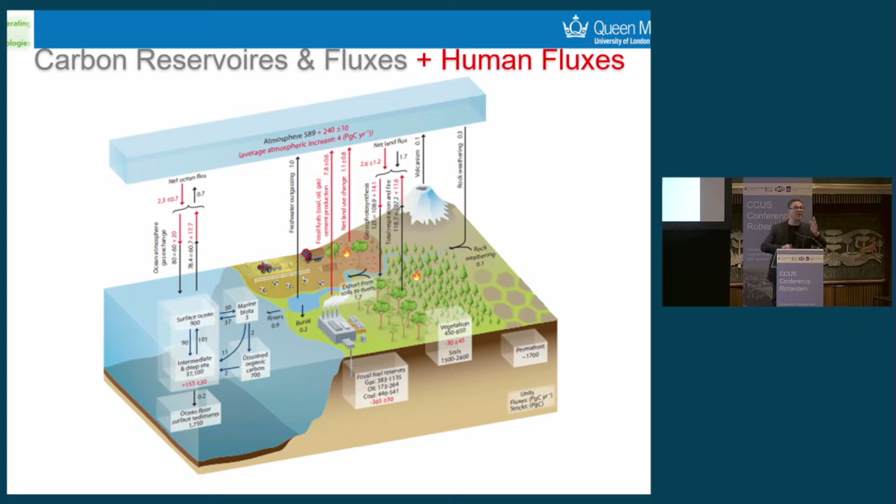So how much goes up and how much comes down? The important thing is that there are these key points where we're breaking the balance in that. So what I've tried to do is look at where the majority is going up and why not a sufficient amount is coming down.

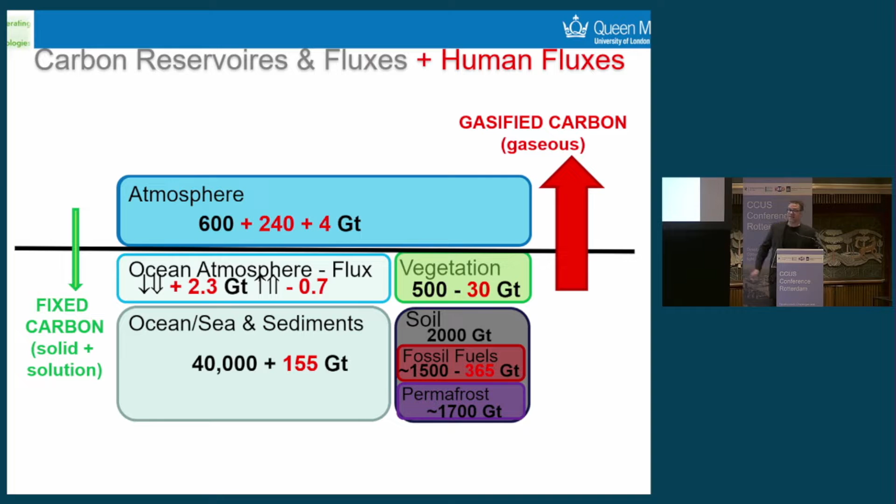And I think this is also one of the problems. A lot of people that are doing the capture and storage sequestering are trying to help solve the problem to reduce what's going up. But what FUNMIN is trying to do is try to increase how much we're putting down into solid, fixed, or in-solution carbon, and keep it there, including methane and other sources. So the numbers, the fluxes there in red, represent what we're doing.

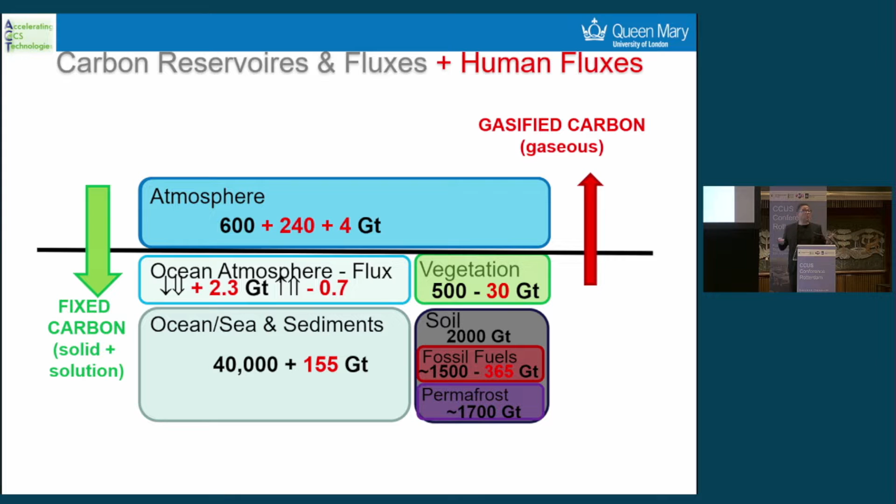That's the FUNMIN project. So what it involves basically is capture of the CO2. We have dissolution and formation of CO3 2-, which is an ion, a chemical driving force, to making magnesium carbonates. And the amount is in megatons. It's not quite the gigatons that we need, but at least it's somewhere along the way of usage.

Now, we've heard the joke about Coca-Cola—we can only use so much Coca-Cola. Where are we going to put this carbon, CO2? So the uses of this, the reuse, they need to be profitable. Because let's be real, if it's not profitable, it's not going to move quickly enough.

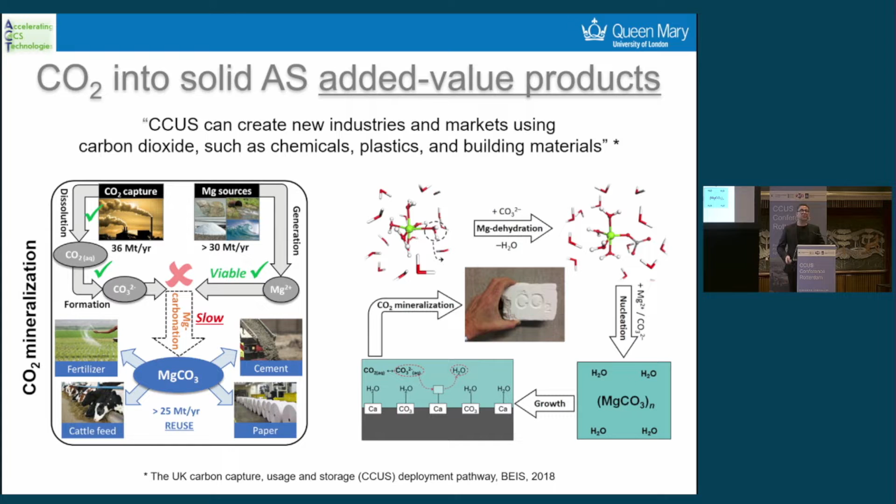So this picture here, where you see the block of CO2, this is magnesium carbonate, a form of it. We can use magnesium carbonates, and there are different forms of them for many different parts of industry. And that's the goal: to generate more solid blocks, control the mechanical properties, and understand the chemistry of it, both at the micro-nano scale and the macro scale.

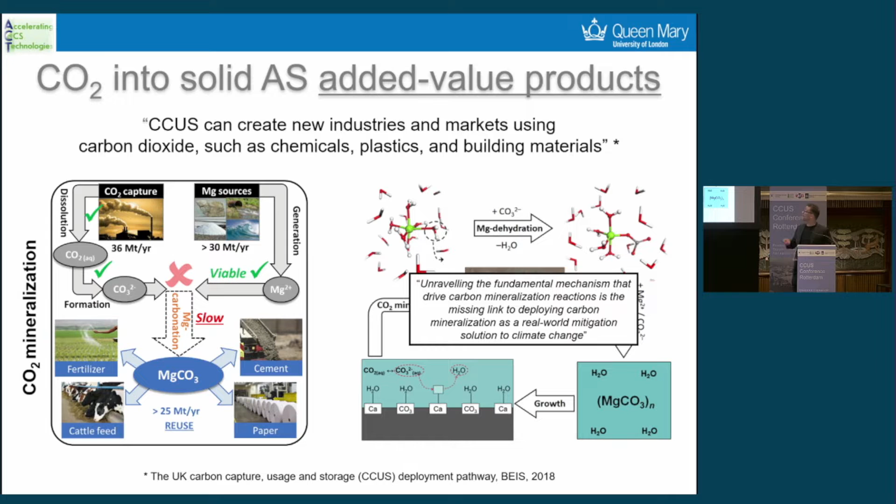So there's also these quotes about unraveling the fundamental mechanisms. That's what we're trying to do in FUNMIN. So there's the project. Originally, it was supposed to end in March this year. We've had an extension, thankfully, and that's been good for us. It's given us some time.

We're the smallest, we're the baby of the ACT family. We didn't have huge funding, but we had enough that we were able to get things going and use the extra time to do something.

So initially, what we wanted to do is make new generations of these carbonates with industrially relevant solutions, while also understanding the nanoscale properties and the nanoscale mechanisms and dynamics that were ongoing. The idea was to make next generations of carbonates—each next generation should be improved in terms of how quickly we can make them and the properties that they have.

And we've been able to achieve that to a degree, as you'll see.

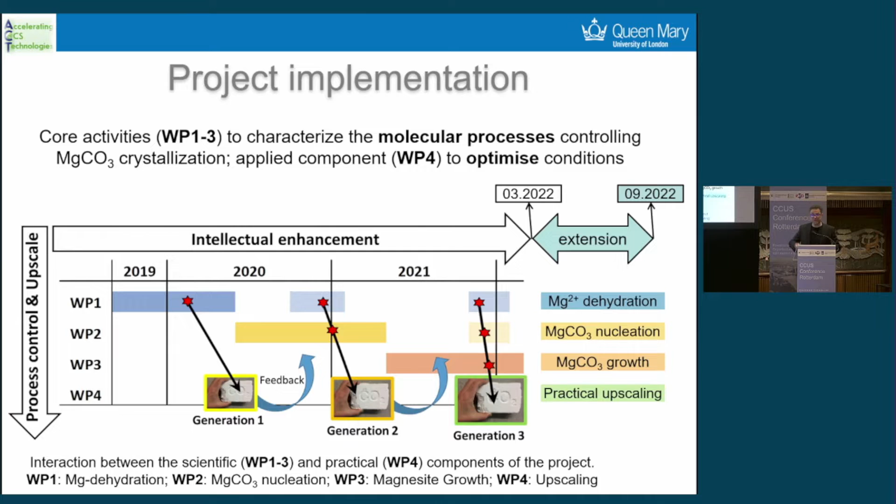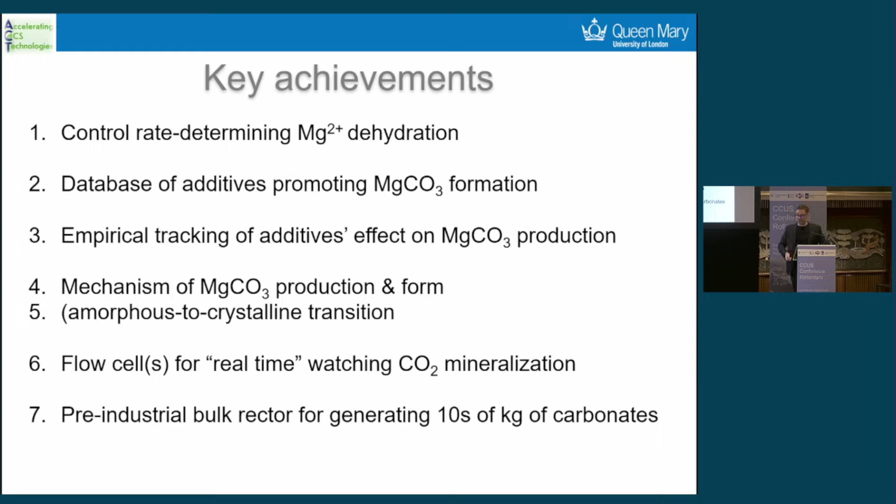So what we've started doing is computational simulations, neutron scattering - maybe you know about synchrotron radiation, neutrons are even at a larger level. We can use realistic blocks and samples representative of these materials. And that's what we've been able to do - engineer reactors and flow cells for real-time tracking of these carbonation processes.

One of the key things - what usually you do in industry is raise the temperature. Magnesium likes to hold on to things in 6 ways, just like a race car with a 6-point harness holds you in place better than a 3-point seatbelt. The ions are held in place the same way - that's why magnesium loves water. The key is to get the water off magnesium, and you use temperature to do that. You want to take some of the water off first to make magnesium available to react.

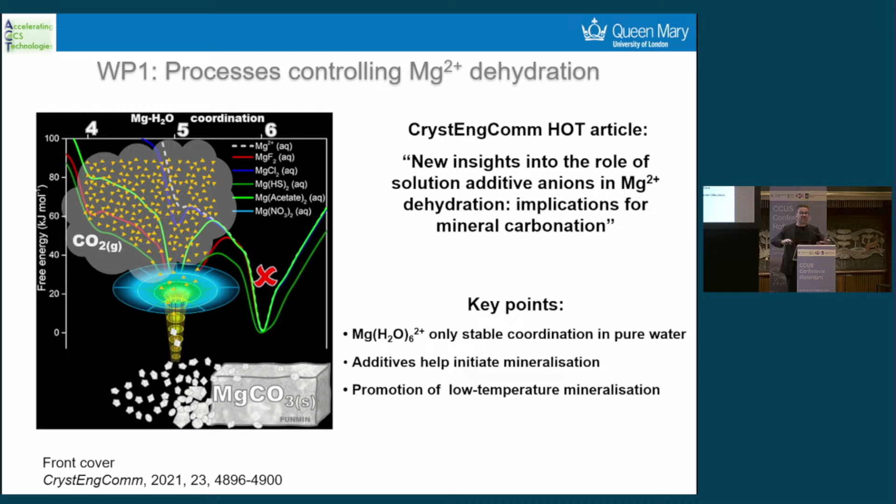We got a cover article on this - I think 9 publications so far. Most importantly, we've grown and have more partners now. Here we're showing a figure of the black hole we're trying to achieve, where we get the water off and allow this reaction to proceed. So computationally, we've made a database.

Why? Because in nature you have impurities from microorganisms, bugs, bacteria, sulfur-loving bacteria. They release impurities that catalyze aggregation and transformation - similar to when you poach an egg, where a small spoon of vinegar aggregates it. It's the same thing here. So which impurities are the best? Which ones are innocuous, non-hazardous, not costly? We've made a database that industry can use, or we can use.

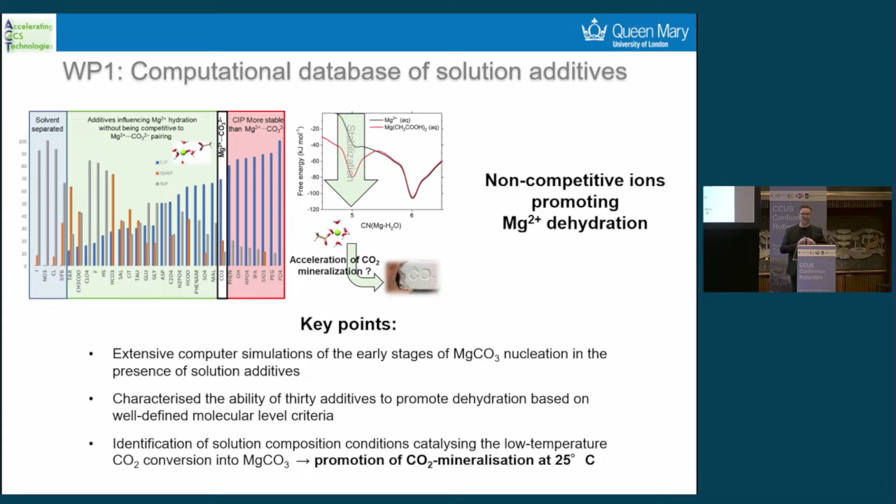We also look at the molecular dynamics - what's going on at the nanoscale, how these things aggregate like the egg, with or without vinegar. We want to keep it together and then grow those particles into something we can use.

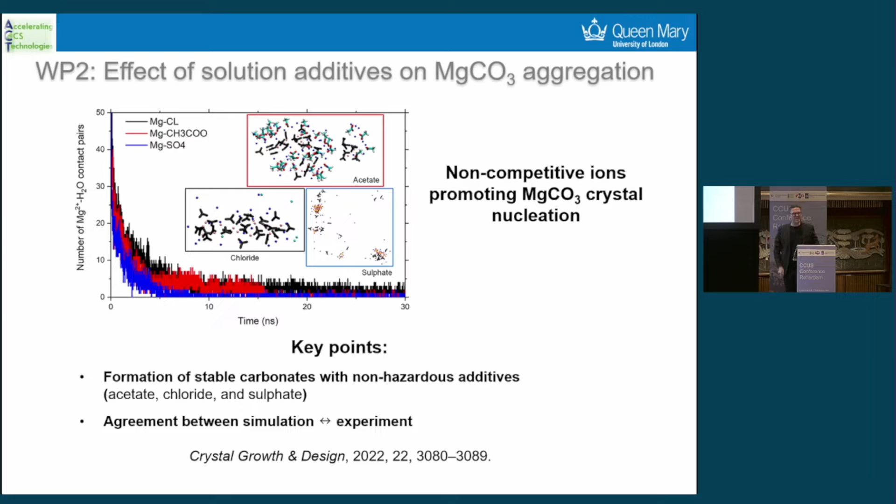This all sounds very theoretical, doesn't it? Where's the real world? Come on, Greg. Give us something we can chew on.

Okay, so we start doing experiments in Grenoble where we heat this up, mimicking what's done industrially with high temperature and high pressure to see what happens. We show the formation of hydromagnesite, then magnesite - similar to the Dolomite Mountains, calcium magnesium carbonates. Marble is a calcium magnesium carbonate.

I forgot to mention - how much carbonate can we make? Mount Everest is estimated at about 160 gigatons. We need a few Mount Everests worth. That gives us an idea of the scale of what we need to do.

So again, I said this all sounds very theoretical. I'm a theoretician - I do a lot of experiments, neutron scattering. Give us something real that we can touch.

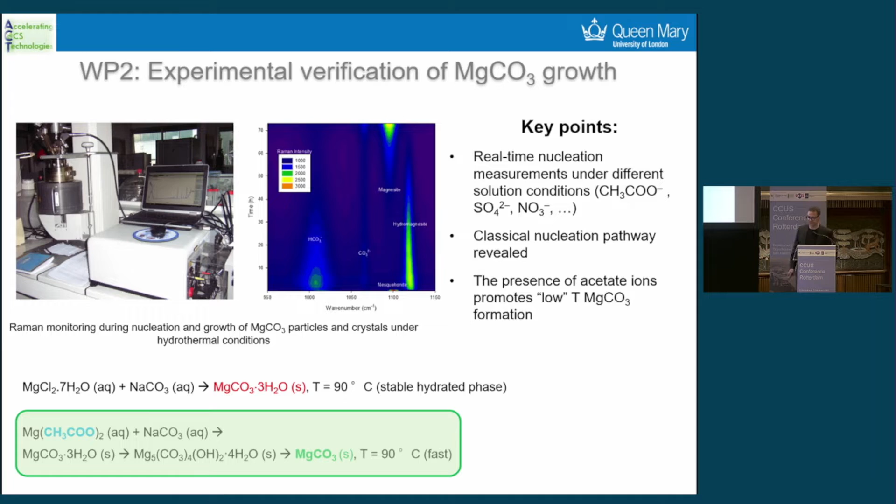So we started building reactors, literally in the backyard. The Homer Simpson model came before this - this is the first generation. We built reactors to do this and track it, at the nanoscale and at the macro scale.

Now what you see here are 2 different forms of the carbonates. We can control whether they're crystalline or amorphous, disordered. Why do you want a disordered system? Because they change, and as they change, they release the magnesium - which can exchange for cadmium, for example - while remaining carbonates. We can use that driving force of physical and chemical change in cementation.

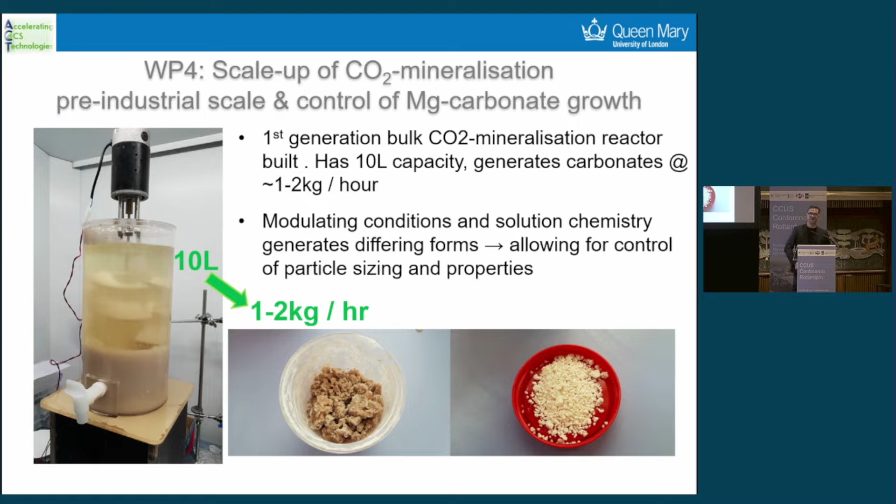Don't believe you, Greg. So we built a reactor that can go on a neutron beamline. Neutrons, believe it or not, at a particle accelerator are non-destructive. You've got this beam, about 7 centimeters in diameter, with high-energy neutrons, but they're not destructive - they can scatter off of matter.

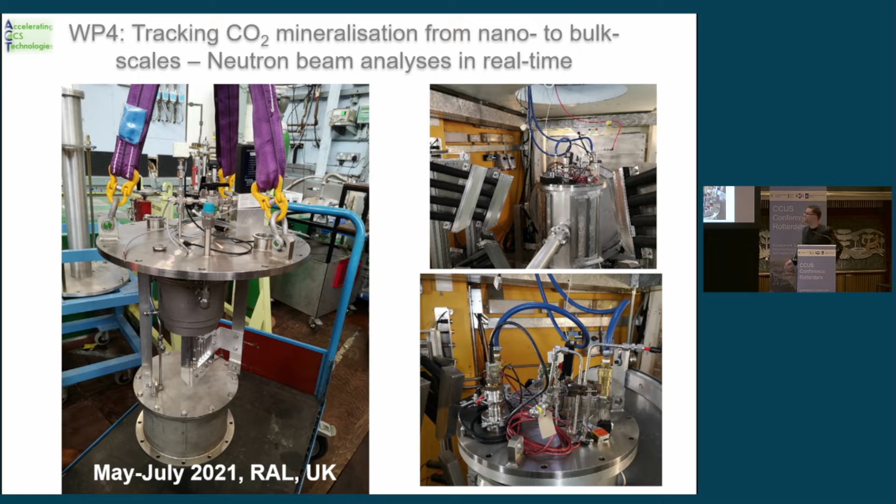When you scatter elastically, that's called diffraction. We've heard of diffraction. When you scatter inelastically, you might be familiar with Raman or these other techniques. We get an idea of the dynamics, the motions in there, the energy involved in these processes. So we inject CO2, we carry out the reaction in real time, the industrial reaction using the dirty stuff, impure. I don't want model systems. I'll go to the model systems later.

What we also made sure of is that the reactors can be reused. Watching the carbonation process and its interaction with the metals. We want to know if we can build these reactors and flow reactors to do this. Great. You can make a few grams. Good for you. We need gigatons.

So what does this tell us about? Quasi-elastic scattering. It sounds like a non-committal relationship or something. Is it elastic? So it's quasi-elastic because it's very low energy. You track translations, rotations, and vibrations in the whole material while the reaction is ongoing. This elasticity, if something's more tough, if you form aggregates, it's going to be more elastic. So we track that in real time. We watch our solutions, we watch our reactions in real time. Don't believe you, Greg. It's too small.

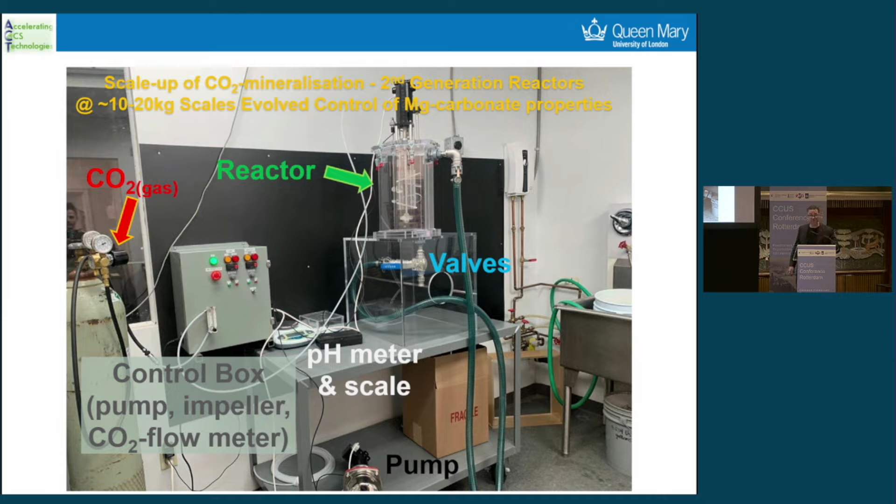So, second generation, well, third actually. We don't show the first one because that's embarrassing. You got to see it. I actually should have shown it. This was just built. We're doing this grassroots. We're designing this. These are modeled after ship propellers for giving the turbulence that you find in tidal pools, in flows of water, how carbonates are formed, how mountains are formed. We want to mimic that turbulence. Does it work? Turn it on. Go.

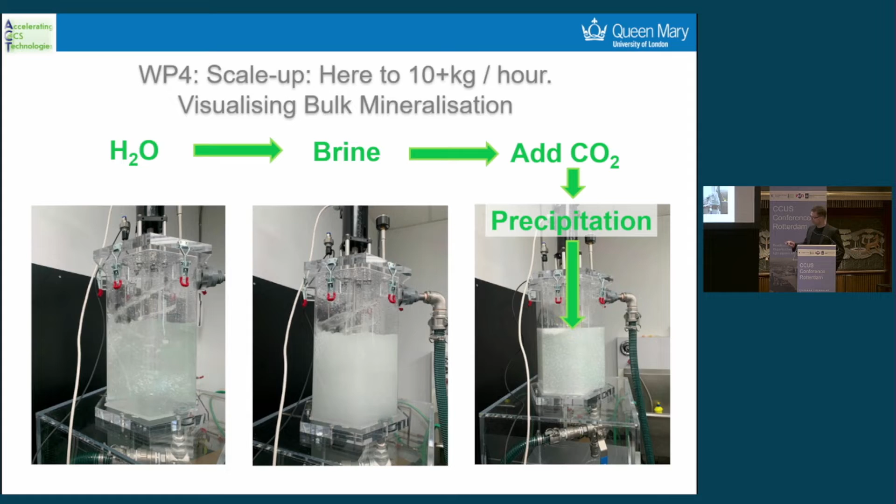We're building in for high pressure. We're testing for pressure. Put the water, put some brine. We can also do industrial brines, the output of desalination plants. You get the flow, physical flow, the heat, and you have a very high concentration of ions. Bam, precipitation right away. Look at those. So this is not just a chemical process. This is a physical process where you start forming, gotta get the right button here, stalactites. We're forming the aggregations.

When we put additives in, we get carbonates faster, room temperature, room pressure, right? That's what we want to do. The other thing is, we could start to control the particle graininess and sizing. Why is that important? What are you going to do with all this stuff? Okay, you got a couple Mount Everests in your backyard. What do you do with it?

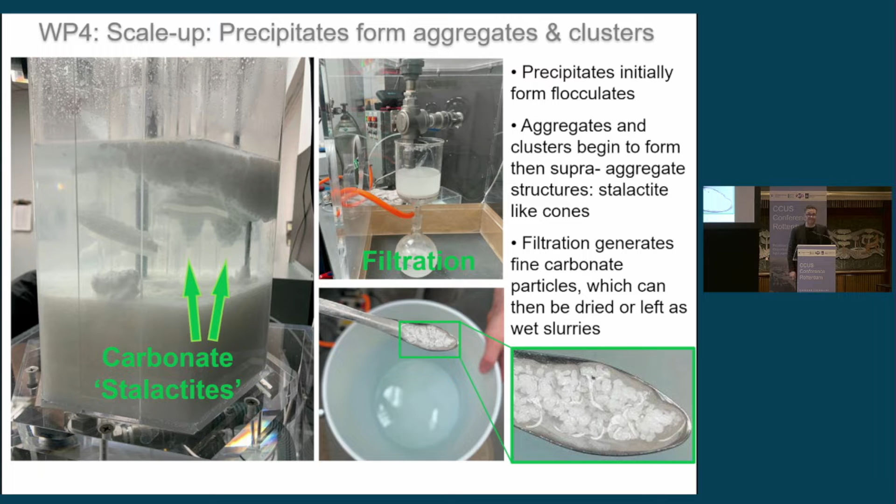Well, this young lady here, who happens to live in Rome, I know her pretty well, says, stop all this playing around in neutron and particle accelerator facilities. Let's do the real. So we did the real. We made 2 tons of concrete, adding our own carbonates and doing tests. Proper facility for testing, all the porosity that was just mentioned in the last talk. We're looking at the porosity, fracture toughness, tensile strength.

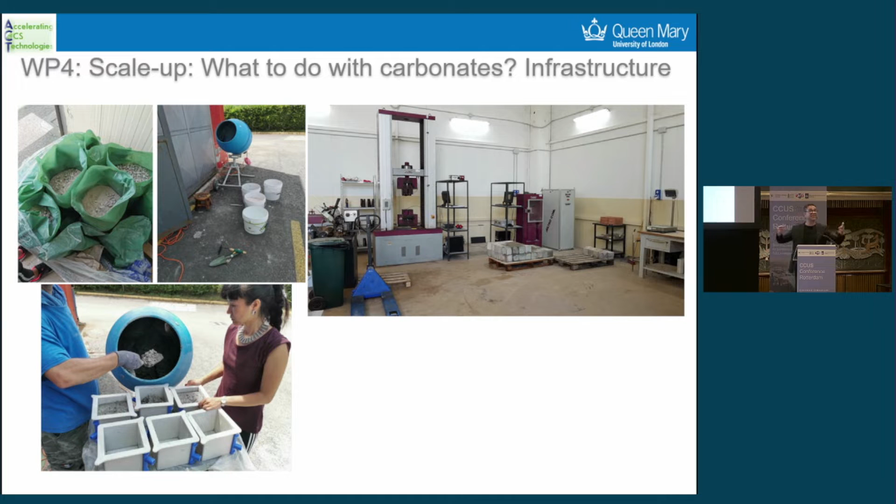You compress them. We do that after 1 day, 3 days. We do the ISO standards as well. You fracture them. We're trying to reproduce the fracture toughness with a percentage of carbonates in them and agricultural wastes in there. So I'll leave this up for a second in my last 3 3/4 minutes. Grainy or sloppy. Why is that important?

So that same young lady happens to know a lot of the Romans. You can put these into silos once you dry them, and they can sit there. They're stable and they don't do anything. That's important because the silo, as it comes out the silo, if we succeed in making these carbonates, now we're going to hundreds and 1,000 kilo. If you succeed in making these, what are you going to do with them? You put them in silos and they can sit there and store. Or can we put it direct into the truck? So we're working with these guys.

This is a pile of aggregate from recycled concrete. You cannot recycle concrete that has plastic fibers in it. So they recycle this. You use energy to grind it up. There's the pile of recycled concrete, the ceramic bricks, everything out of Rome. We're putting our stuff in there, making sure it can be stored outside as well, go through the silos and everything.

And we're also testing, if you know concrete, cement slump. It's important. When you pour these pillars, you pour in the cement, it has to go down to the bottom. You want it to fully self-compact. And you also use vibrations for that. So we're doing all these tests at that level.

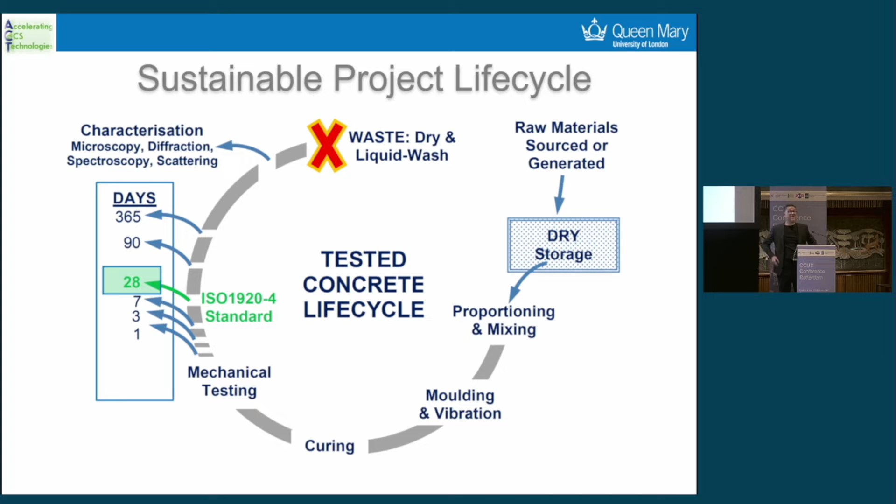That's what we're trying to do. So we're keeping it sustainable. That's the new term. We're making sure that there's a whole waste stream for all of this because we're growing into 2,000 kilos when we go to do these things. We've put in agricultural wastes, which we have access to, that nobody wants. It's like fly ash many years ago. Nobody wanted it. They paid to take this stuff. Here, take this off my hands, bury it in the backyard, right? So that was what they're doing with this waste here.

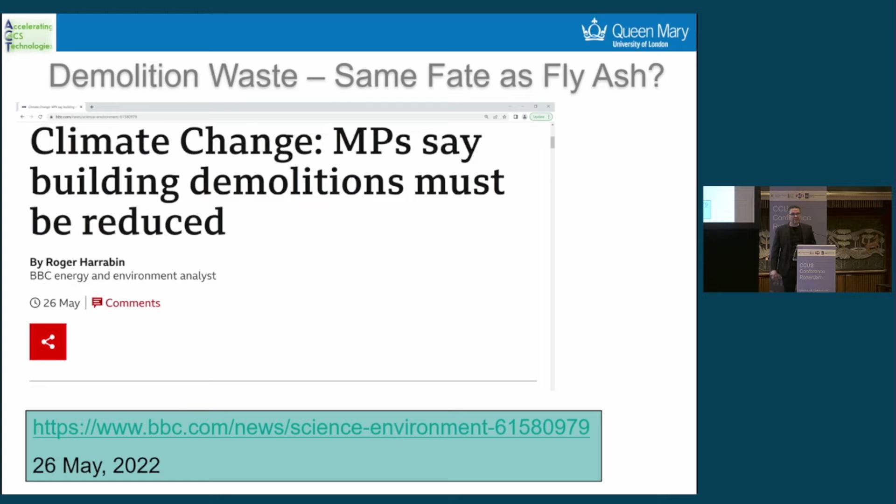Well, now there's a problem because just on the 26th of May, not too long ago, they want to stop the demolition of buildings. It makes sense. And that means that that pile there might be going the way of fly ash. They've been reliant on the aggregates, and here we come along with our own aggregates to help replace that.

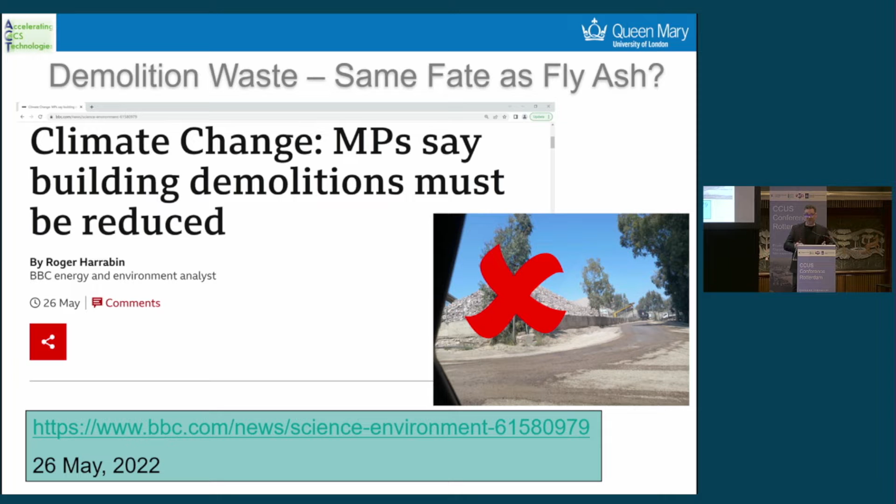Putting them through the silos, we're putting them into concrete, so we're able to do this process from the molecular level, nanoscopic, that's what you need these glasses in the computer for, to understand all that stuff, and we're getting out there with that young lady there and helping shovel this stuff to do the tonnage and testing it to satisfy ISO standards. Maybe we can put some of those carbonates into the concrete, retain the properties, maybe elevate some of them. The resistivity and the fracture toughness is what we're testing right now.

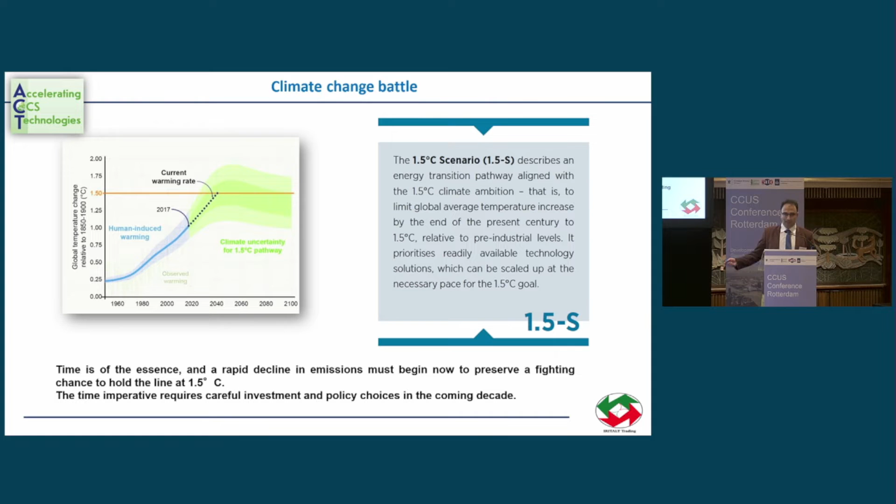Okay. Maybe we can escape very fast from this slide. Everyone knows what is the situation and what shall be done by all the countries and by the policies mainly in all the world.

And now I can briefly tell what our concept is in this project, the NEXTCCUS system. It's a way to store renewable energy. We can say something to store renewable energy for the lifetime, and we can do it by using the circulation of carbon, which is CO2 in this case.

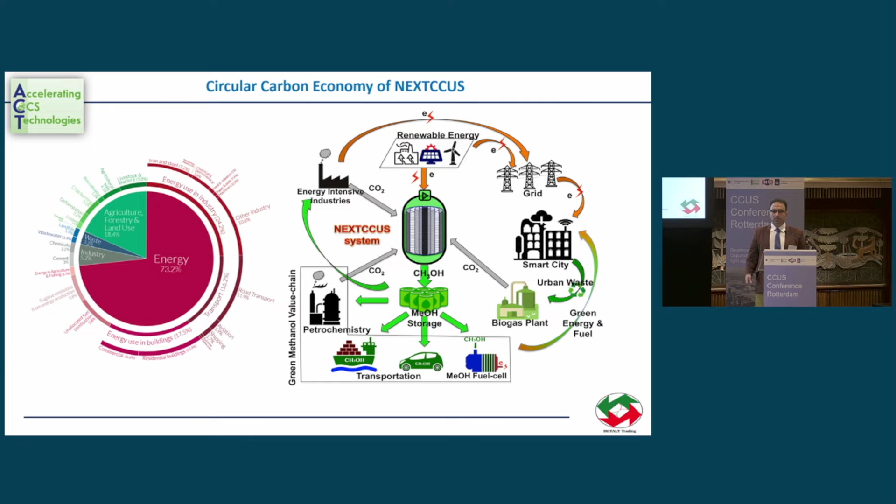Maybe you know electrocatalytic systems. They're very famous for hydrogen production, water splitting, and one traditional way for the conversion and reduction of CO2 is reaction of hydrogen with the CO2 molecule to produce, for example, one of the main things, liquid methanol. I will tell you why it's very important. In this case, we can circulate this CO2 emission by conversion to this liquid structure.

There are different types of energy sectors in recent years. We can divide them into three types: hydrogen-based strategies, batteries for storing the electricity from renewable energies, and another type, which is liquid systems and liquid molecules, which can be stored.

And you can see here the differences in policy making, how big the plants are, how heavy the systems are for producing a specific amount of energy, and how much investment is needed, the difference between these three types. So this is one of the reasons why we selected methanol as our product and this strategy.

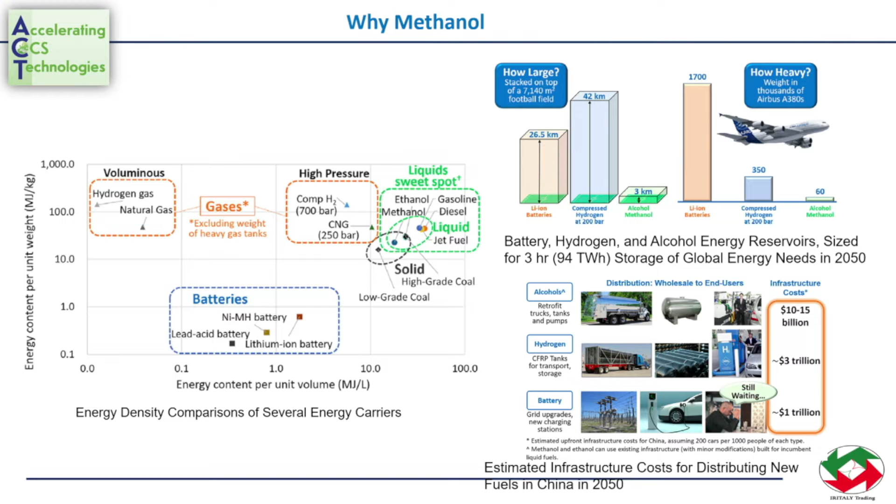So now going to methanol. Methanol is a very famous chemical. Most of the plastics and other materials we use come from methanol conversion. It is one of the base materials after conversion of natural gas, and most methanol at the moment is produced by the conversion of natural gas.

And other chemicals, formaldehyde, very famous for all the plastics, and some other olefins, and some parts for mixing with gasoline in the energy sector come from methanol, with 98 million tons of demand per year.

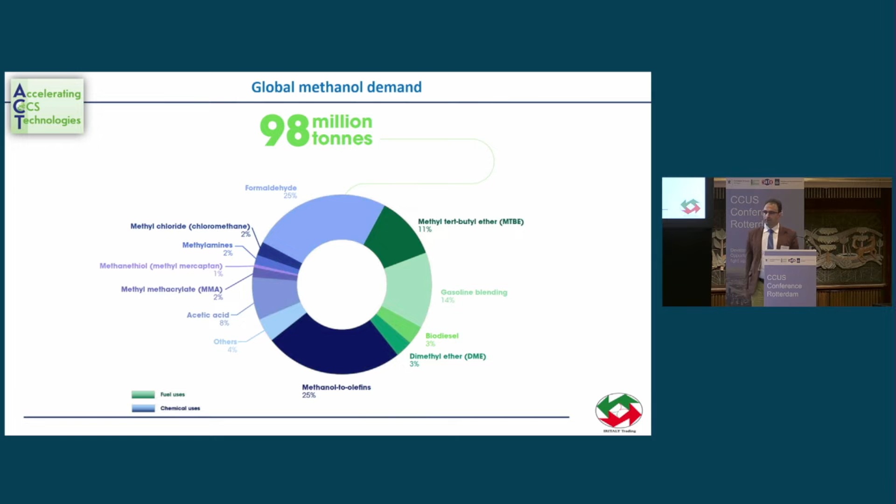Now I'm going to focus more specifically on e-methanol. E-methanol comes from using electricity and carbon, using CO2 and reducing it to methanol. We can call this classification e-methanol, but we can classify three different ways of converting CO2 to methanol to produce e-methanol.

The first one is more traditional, and some plants around the world use it. They have electrolyzers. These electrolyzers split water, producing oxygen and hydrogen, and this hydrogen, in another reactor, catalytically and under pressure, converts to methanol by reaction with CO2. Another possibility is to produce syngas, from hydrogen and CO, and convert this syngas with CO2 in another reactor to produce methanol.

The interesting thing, still not developed and at very low TRL, is what the trees, nature, usually do: direct conversion of CO2, without water splitting or producing any hydrogen and then converting in some very complex system. This is the direct reaction of water and CO2 in the electrochemical way.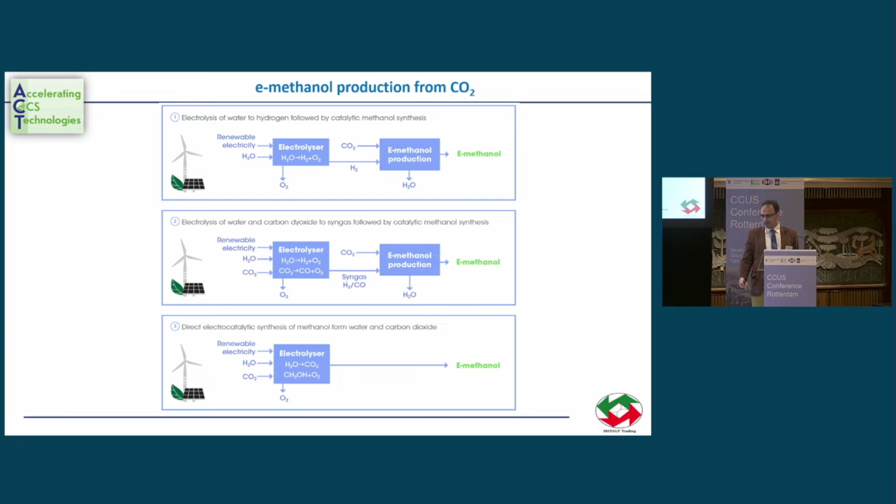Okay. As case studies, some plants recently started to industrially produce e-methanol. Very famous is George Olah in Iceland, which produces 4,000 tons of methanol from conversion of CO2. All these plants use the first strategy I described, via water splitting.

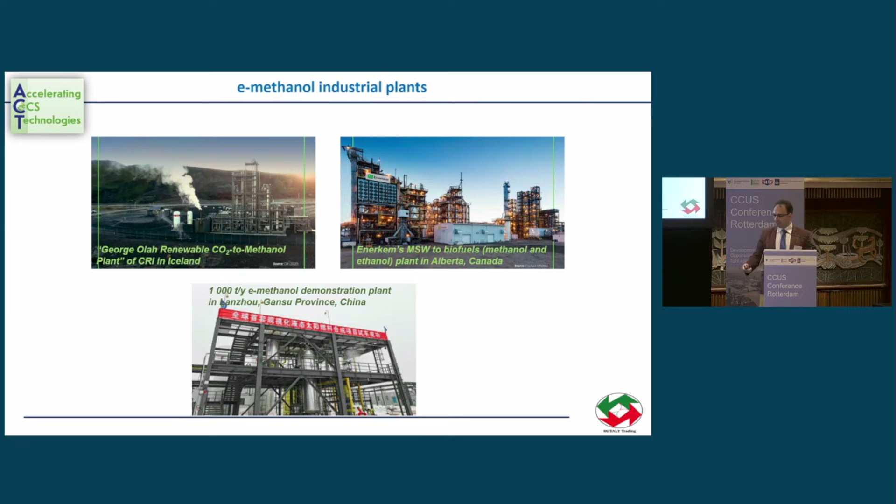E-methanol is very famous now, as a methanol hub, with Siemens and some other companies starting to put more investment in it, mainly for applications in the fuel sector. It's a very good clean fuel, a first alternative to replace fossil fuels, especially for marine transport. Some big ships are currently changing to methanol as a fuel.

So now, coming to NEXTCCUS. This project is based on 8, and I can say 9, partners from different countries. We are 2 Italian; Italy is our coordinator. We are in Italy as a coordinator and some part of the project, and we have CNR from Italy, and 1 partner from Hellenic Mediterranean University from Greece.

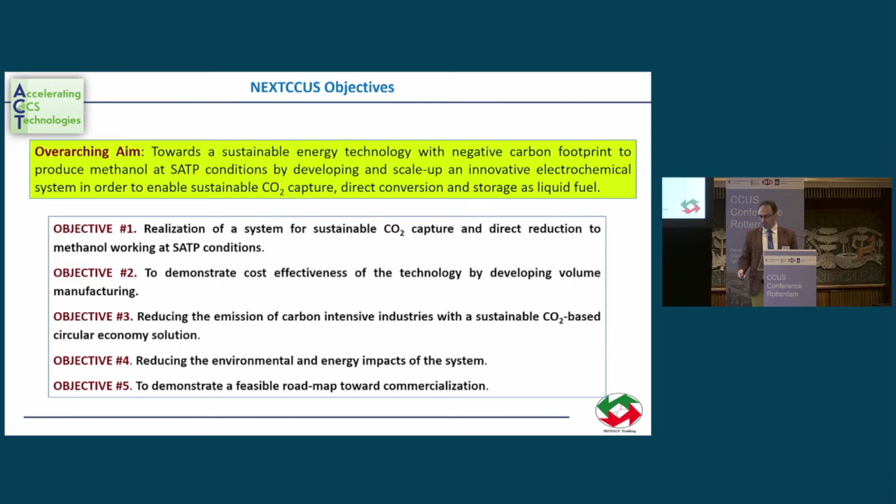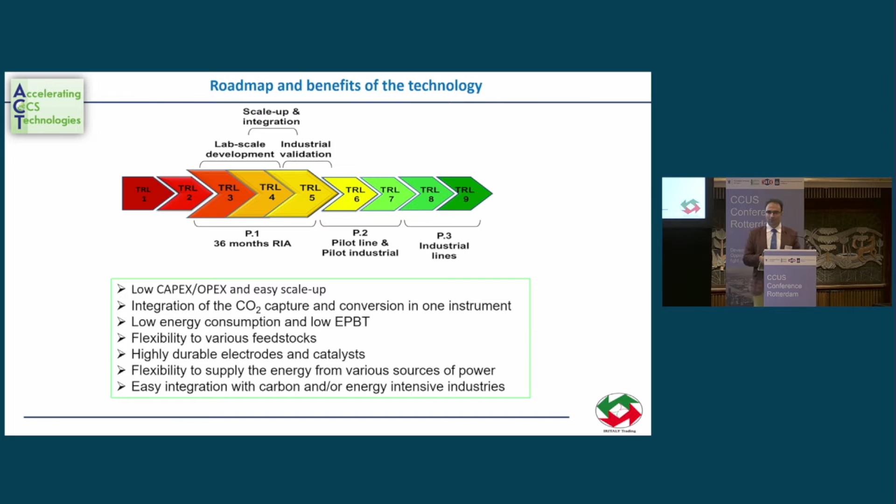As you can see, at the moment we can claim we are close to TRL3, based on the projects that we already run and the reactors that we already have for this kind of direct CO2 reduction. By this project, we are going to develop this system with a specific device structure and using some new materials developed in the USA, using these materials in all parts of the electrodes and membranes, which I think should be very interesting for collaboration with other projects, as I saw today. And this system can be scaled up.

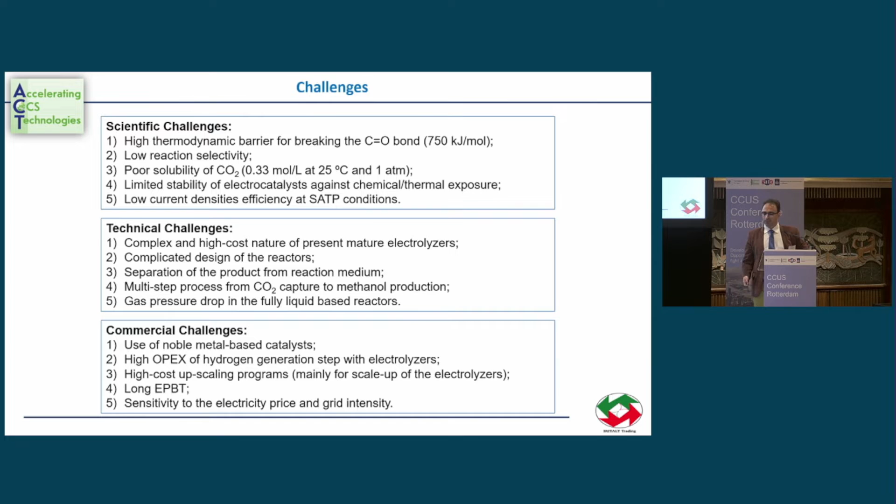Specific challenges, I can go faster. There are a lot of challenges which should be addressed during this project, from the scientific, technical, and commercial side. The project uses gas diffusion electrodes as a specific system to increase the absorption of the CO2 and make the reduction very selective, using the specific patent that we have for the piezoelectrocatalyst and two-dimensional transition metal MXenes, which, as I told you, are developed in the USA.

We have 7 work packages, with work packages 6 and 7 being communication and coordination. The first work package is running, and there are a lot of results until now for the lab scale development of the system. At the same time we have simulation, modeling, and phenomenology of this system. Next year we will have the scale up, when the results from these 2 work packages come, and at the final point the industrial validation of the system. Supporting these work packages, we have sustainability assessment.

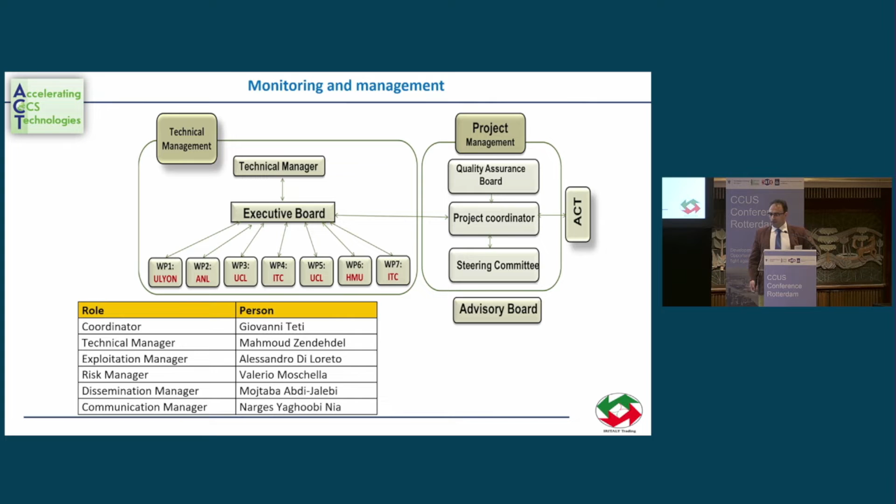I can pass over this. We also have some advisory boards from different companies; 2 big companies are a steel producer and an energy producer, with which we are going to test this reactor as a final point, and with which we already have another national project.

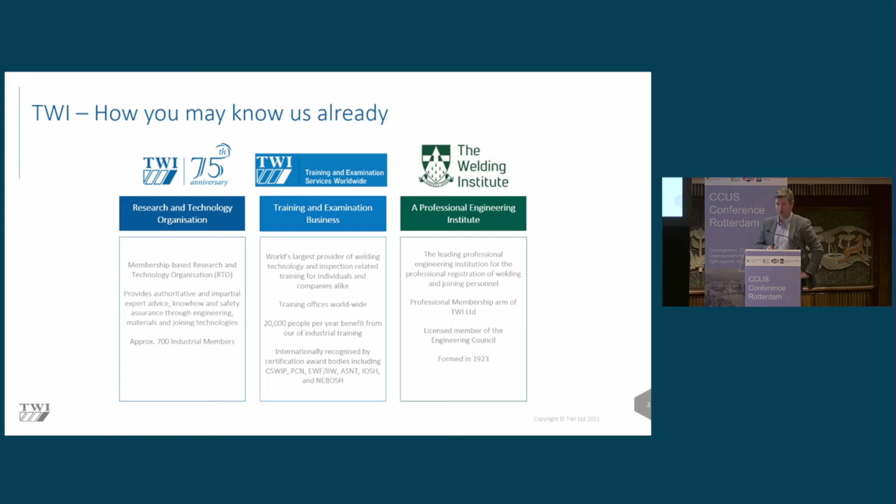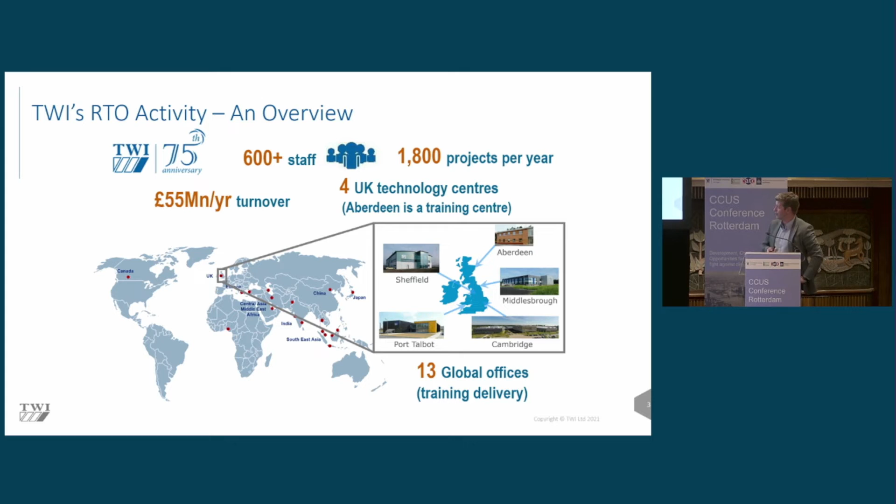Okay, I've been given a slide set to present. I've got a few corporate slides at the beginning. TWI are the coordinators of this project, and if you don't know us, we're a UK-based research and technology organisation. We also undertake training and examination worldwide, and our parent company is a professional engineering institute that awards chartered engineer status in the UK. From an R&D perspective, we are headquartered out of the UK. We're about 600 staff, and we have 13 global offices to deliver training.

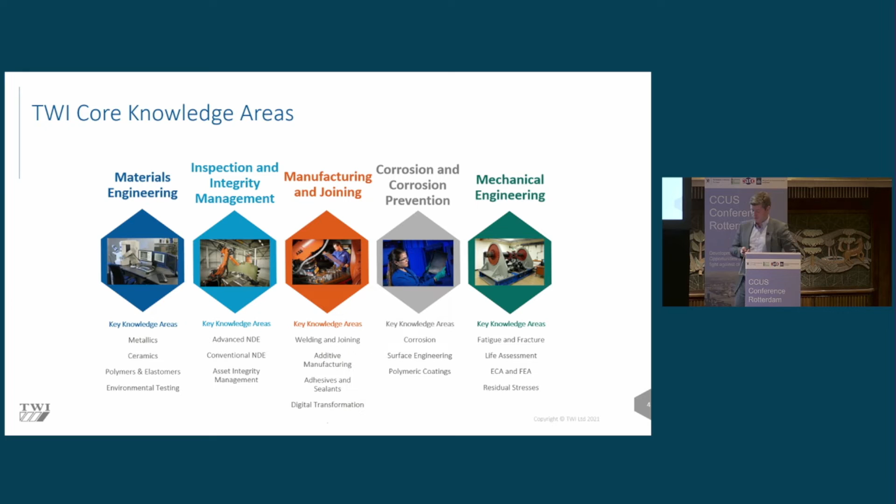Our core knowledges are very much around understanding how structures work, how to fabricate them, how to make sure they are safe, and how to ensure their through-life integrity in the various disciplines that I've listed there. Now, my colleagues that are involved in this project sit in the corrosion and corrosion prevention area. And I have a background in manufacturing and joining and mechanical engineering. So I've spent the last few days reading about this project and trying to understand it as best as I can.

So to put it briefly, the intention of the CoCaCO2la project is to develop and apply some state-of-the-art advances that the consortia have developed over the past few years and overcome the scale-up challenges and produce an integrated room temperature carbon capture and usage system to produce multi-carbon products such as ethylene. It's going to be a kind of small lab-based system. And what it will do effectively is allow us to take CO2 reduction and extend it from producing gases such as syngas or methane and move it towards multi-carbon products such as ethylene.

The project began for the UK and the Grecian partners in Q4 2021, and then for the USA partner, which is Idaho National Laboratories, in Q1 this year. We've got a relatively modest budget of a little under 1.3 million euros and about 2 years to complete this project.

So this is the project consortium. I've talked a lot about TWI already, but we're joined by UK partners, the University of Leicester, and their surface engineering activity there, as well as Technovative Solutions Limited to do life cycle analysis for the project. And then outside of the UK, we have Centre for Research and Technology Hellas from Greece, and Idaho National Laboratories in the USA. We've also got NSG Group, which is the parent company for Pilkington. Pilkington is a rather famous glass producer, and they are providing industrial steer to this project.

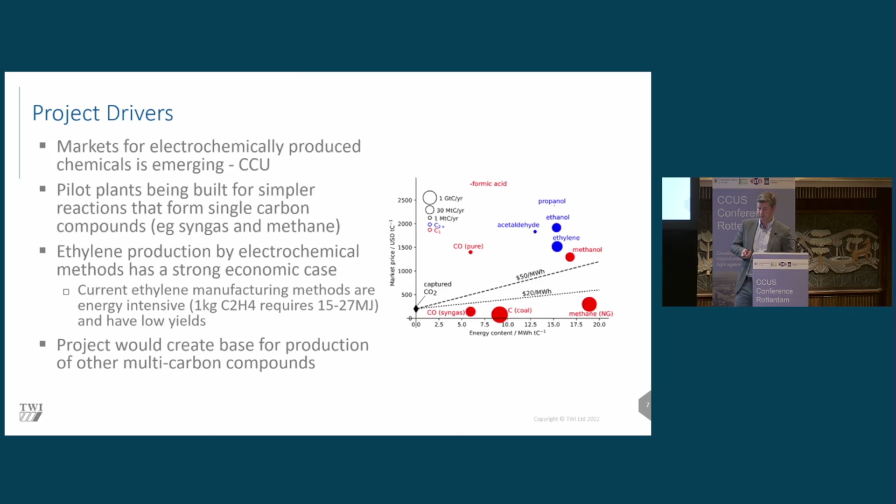Worth noting that the current manufacturing methods for ethylene are very energy intensive and produce quite low yields. So the intention is to create a kind of base for production of multi-carbon compounds after ethylene that could use this technology. This is the project concept.

Effectively, what we do is take some CO2 from an industrial user, out of a flue gas. We use an amine-based solvent to capture the CO2, and we're trying to look at something that is a kind of phase change approach here. We're looking to split the solvent once it's CO2 rich into a rich amine, and then put it into an electrolyzer.

This electrolyzer will make use of some novel technology, particularly around copper electrodes, that will allow us to produce a variety of different gases, but in particular there'll be ethylene, carbon monoxide, and hydrogen. Then we'll use some novel separation technology to separate the ethylene out as well.

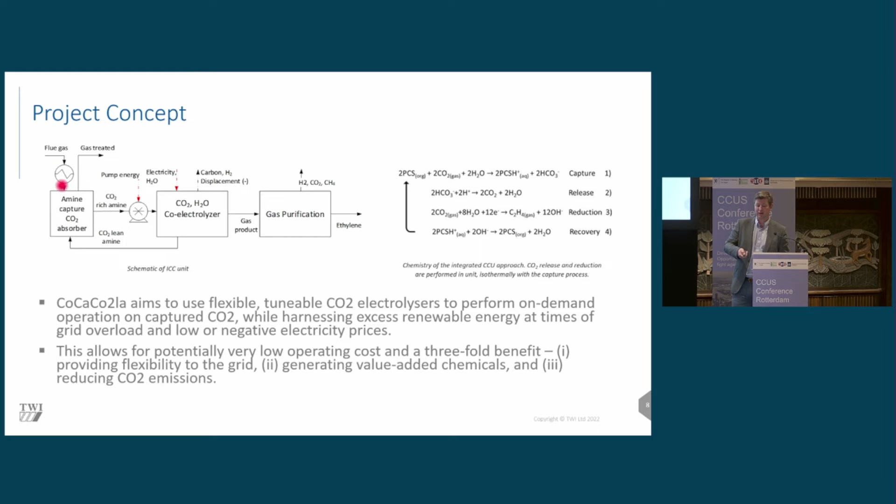There's a threefold benefit here. We can operate this concept flexibly, taking electricity at its cheapest, or perhaps when it's being overproduced by renewable energy sources. We can create value-add chemicals, and we can also reduce CO2 emissions by taking it out of existing production from the flue, and also replacing incumbent CO2-heavy manufacturing concepts for ethylene.

This is the project timeline. We started the project back in November of last year, so we're about 6 months in now. We're coming to the completion of work package 1, a little bit delayed because Idaho National Labs got their funding a little later than the European partners, but the ambition of the consortium is still to complete by month 24. So I don't have any results to share with you today.

Perhaps what I'd like to do is just share a few more details around the project and some of the key innovations we'll be focusing on. So the project consists of 9 work packages.

Effectively, the innovations happen in work package 2, where we're looking at the amine-based solvent to capture the CO2, and then work package 3, the development of copper-based electrodes and catalysts, and turning those into larger electrodes in work package 4.

Work package 5 will look at the membrane system for separating the gases, and work package 6 will look at the electrolyzer design and construction of this lab-based demonstrator. Work package 7 is an overriding work package looking at the life cycle analysis, so carbon footprint and sustainability assessment.

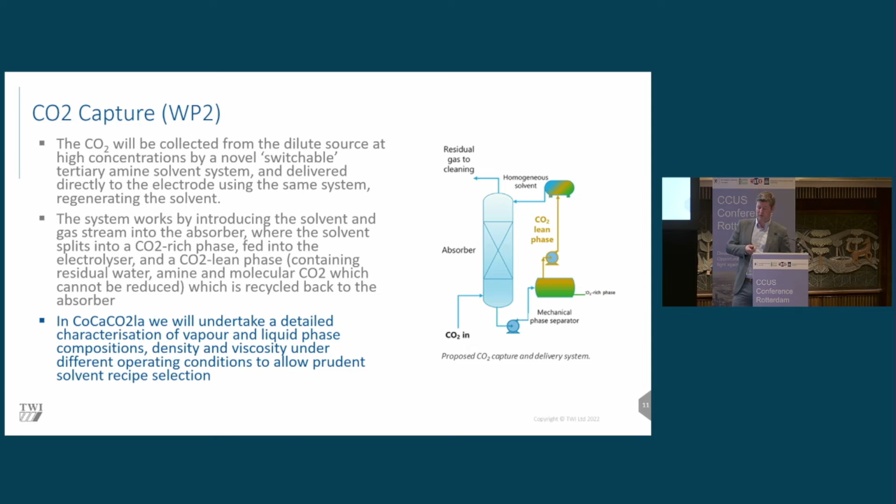In CoCaCO2la, we're going to undertake a detailed characterization of the vapor and liquid phase compositions, density and viscosity under different operating conditions, hopefully to allow a prudent solvent recipe selection.

We know from previous research from the consortium that copper metal surfaces can produce ethylene as one of a mixed product for many years, but they do get very inconsistent results. So you have low efficiency, and often many other byproducts produced at the same time. There's been some good recent research showing that if you structure the copper catalyst correctly, and then the electrode correctly, you can get increased yields and also move towards higher efficiencies as well.

So the challenge is the initial research is looking at cost of single crystal or nanostructured catalysts, and that's quite prohibitive for scaling this technology up.

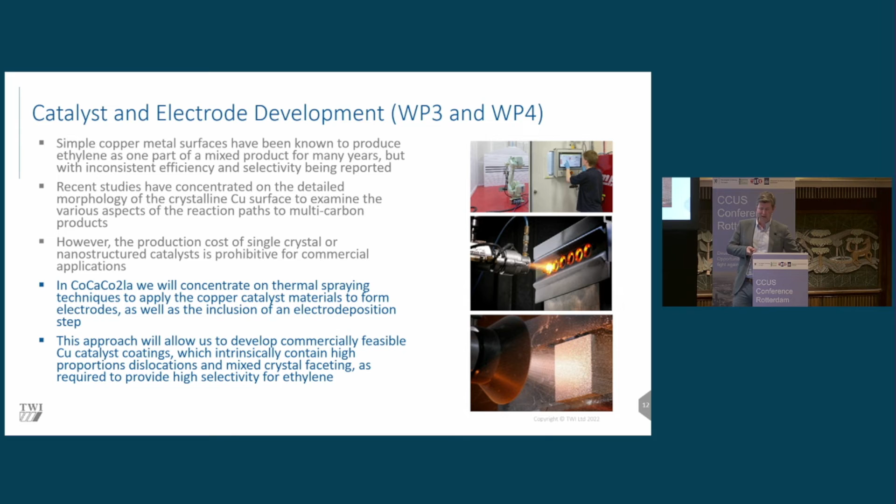So in CoCaCO2la, we're going to look at more industrially accepted technologies, such as thermal spraying and cold spraying techniques, as well as electrodeposition. Thermal and cold spraying are effectively methods of taking bulk forms of copper, usually in wire or powder, putting them through a gas gun, maybe with a bit of temperature, and depositing them onto the surface into a new structure. The idea is hopefully we can mimic what you do with a single crystal or nanostructured catalysts, but in bulk form and at low cost.

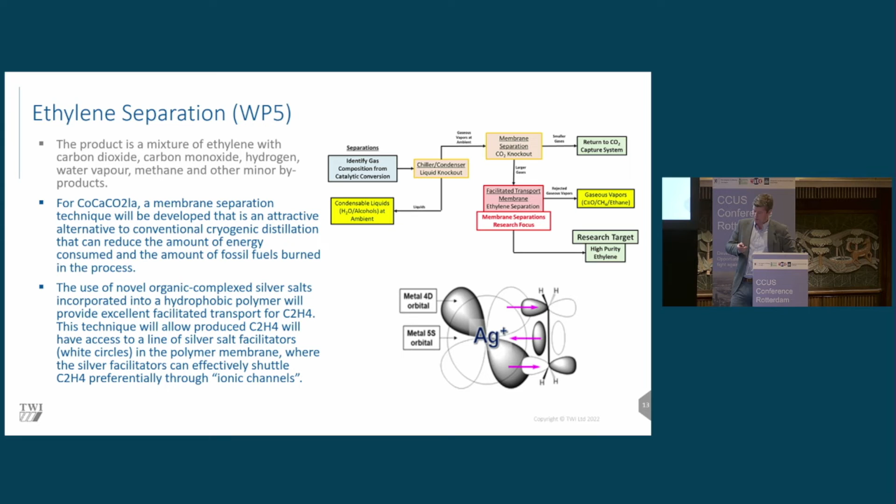And then ethylene separation. This activity is going to be led by Idaho National Laboratories. They effectively will be looking at a multi-step separation process, as well as the adoption of a kind of hydrophobic polymer involving complex silver salts that I don't really understand. But if you want to ask someone, please catch me at some point and I can redirect you to the right person.

And then the electrolyzer development as well. This technology has already been demonstrated for syngas. Critically, what we will do is add in the copper-based electrode that will allow us to deliver a liquid, as well as then use the electrolyzer to create ethylene instead.

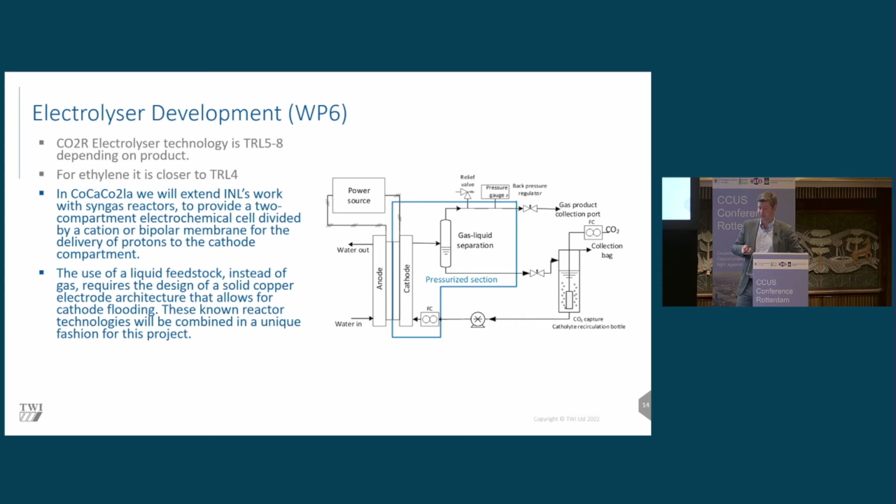Okay, so this is just about my last slide. I see my plan is nearly complete. My time is nearly up.

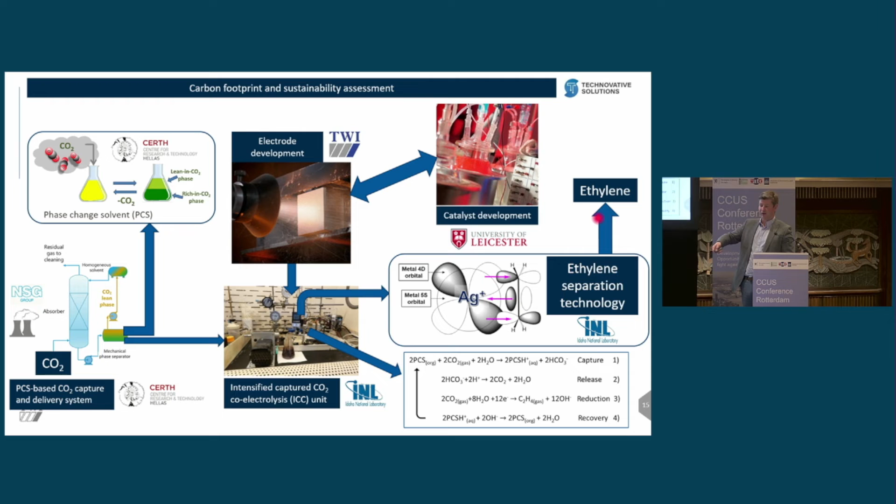This highlights how the different project partners are going to work together. We effectively have a Pilkington Group advising us about the carbon emissions and providing effectively steer on what the CO2 output will be. CERTH will be looking at the amine-based solvent and the phase change approach there. And then TWI will work in partnership with the University of Leicester to develop the catalyst and then the electrode, and then passing that on to Idaho National Laboratories to incorporate in their electrolyzer, which will also involve the ethylene separation technology they're developing to ultimately produce small amounts of ethylene on a lab-based demonstration.

So finally, I'd just like to acknowledge the other project partners, as well as my colleagues at TWI, the various funding bodies, so the Department of BEIS in the UK, GSRI in Greece, and the US DOE, and then the organisers of today, and of course the ACT funding body. So thank you very much for your attention.

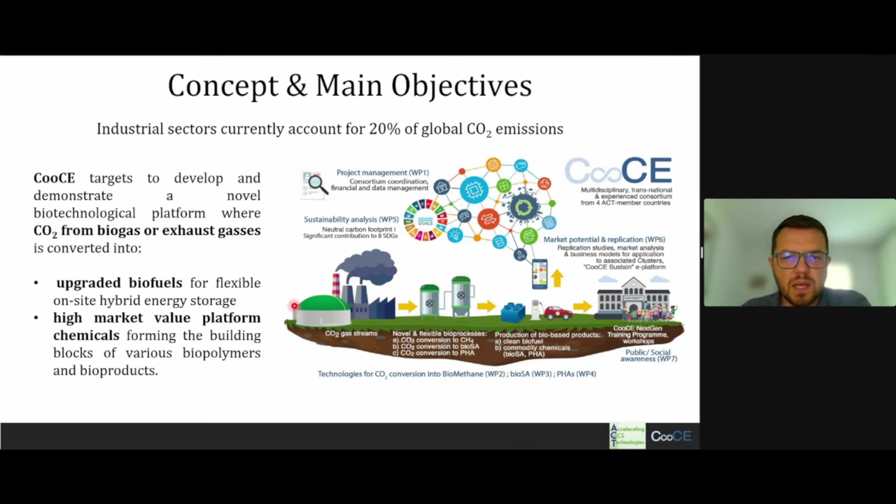Our working gas for the project will be biogas, and for that we are collaborating with two companies, one in Italy and one in Denmark, that are biogas producers. Biogas is actually a gas mixture containing methane, the energy carrier we're interested in, but we also produce a lot of CO2 from the digestion of the biomass in these big vessels. So the idea is to clean this methane to have a better fuel, while at the same time using this CO2 to make useful materials and chemicals.

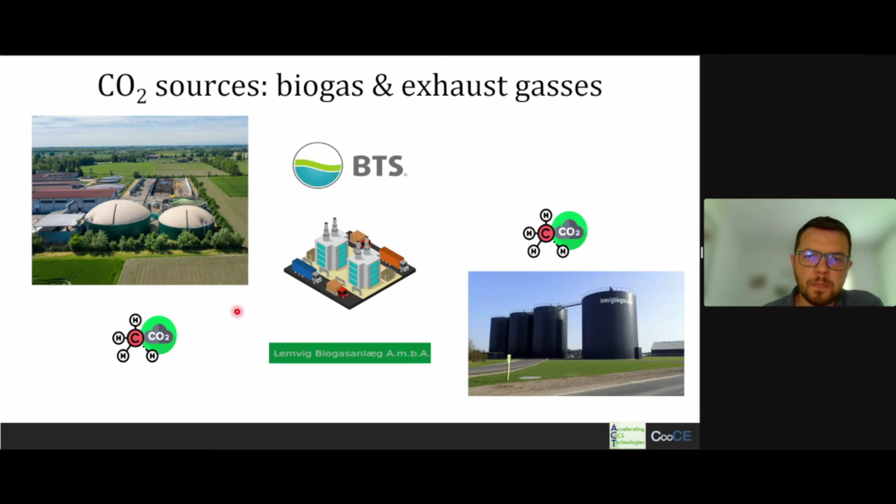We will address this overall objective using parallel approaches. In one case, we will take this biogas and use excess renewable energy to produce hydrogen, and use this hydrogen to feed bacteria that are able to use the energy from hydrogen to produce methane. So we will do the so-called biogas upgrading by converting the CO2 included in the biogas into methane. This approach has two objectives: one is that it balances the peaks in the electricity grid due to the increase in installed renewable energy; at the same time, we produce a better fuel, more rich in methane and with less CO2.

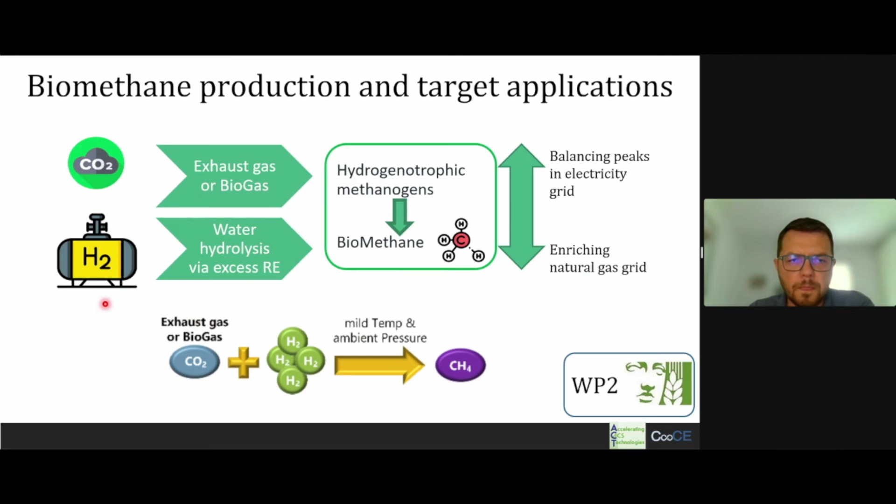In parallel, using the same biogas flue, we want to use this gas to make materials. We selected two different kinds of materials that can be converted into different bioplastics. In the first approach, carried out particularly at DTU in Denmark, they selected at lab scale some bacteria that are able to grow on waste, organic material contained in waste. This waste mainly contains sugars, and using the energy from these sugars, they're able to convert the CO2 from the biogas into biosuccinic acid. So at the end, the two products will be a cleaner biomethane, but also this biosuccinic acid. They already proved this idea at the lab scale, and during the project they will build a pilot where they will scale up this production, and also scale up all the phases, the downstream processes needed from the bacteria fermentation to extract the final biosuccinic acid product.

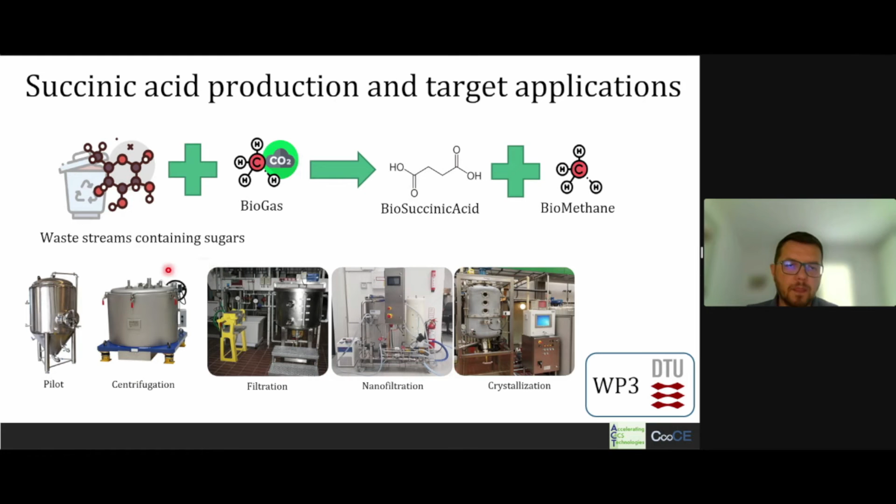The third parallel approach is the one we'll pursue specifically in Padova, where we will again take this biogas, and the objective here is to produce clean biomethane together with another material, in this case polyhydroxyalkanoate, monomers that can be converted into bioplastics again. Here again we will use bacteria, of two kinds. One kind, called cyanobacteria, are able to do photosynthesis, so they use the energy of the sun to convert this CO2 into these monomers. The other kind of bacteria are heterotrophic, so they use sugars, again coming from waste streams, to fix this CO2 into these bioplastic materials. We started with lab scale results, and during the project we will increase the scale into a pilot scale and produce some of these monomers for bioplastic production.

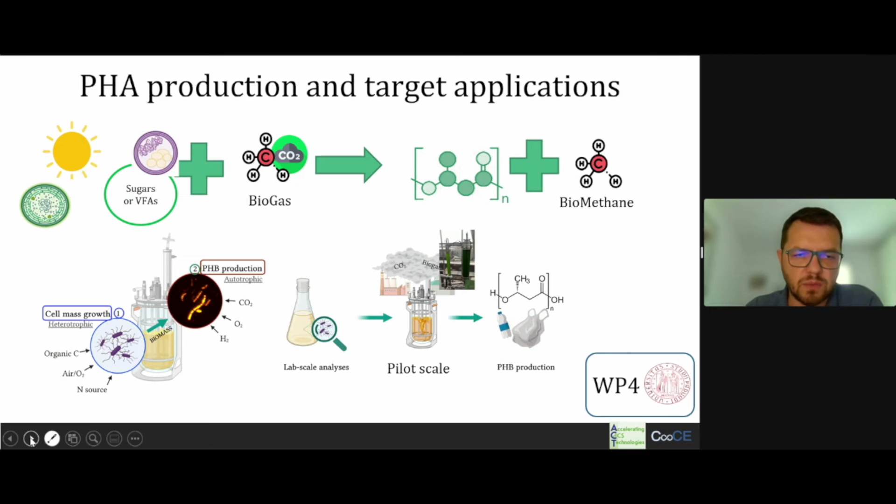So both on the biosuccinic acid side and the polyhydroxyalkanoate side, they will produce these monomers that are known to be suitable for bioplastic production. Part of the work will be starting from the bacteria and the biomass, extracting these materials, assessing the yield, the purity, and the productivity of the process. In the project we have several companies, a couple of them expert in bioplastic production, who will assess the quality of the material we produce. They will use these monomers to make actual biomaterials. Then we have two industrial partners who will assess what properties these bioplastics have, and which real life applications we can think of using them for, looking in particular at the market for packaging.

So these are the more technical parts of the work. Of course, in addition to assessing the results, how the material we can produce from these waste streams compares in quality, it's really important to assess the sustainability.

And so for that, our partner at the Imperial College in London uses different kinds of assessments, so a life cycle, a social life cycle assessment, and environmental life cycle costing, to make what is called an integrated sustainability assessment. So we look into different aspects of sustainability, so of course economic, environmental, but also social and in terms of policy, to enable us to assess the technology that we are developing, what is the potential impact, and what will be the real benefits that we can drive into the society.

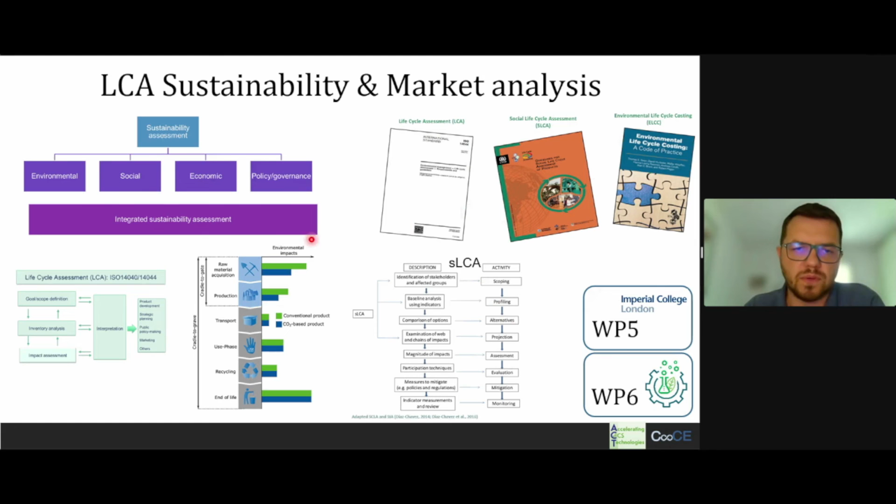In parallel to this sustainability assessment, of course, it is also important to design a market strategy. So all our industrial partners, led by EcoResource in Greece, will use the results to make a market assessment and drive an exploitation strategy for the results that we are producing.

All this work, of course, will be brought together with all the communication strategies. So we started all the social media profiles, the website is online, and now we will start to put the first results and the activity of the project to disseminate them better. So I think that's all. As I said, we just started a few months ago, so all activities have just started.